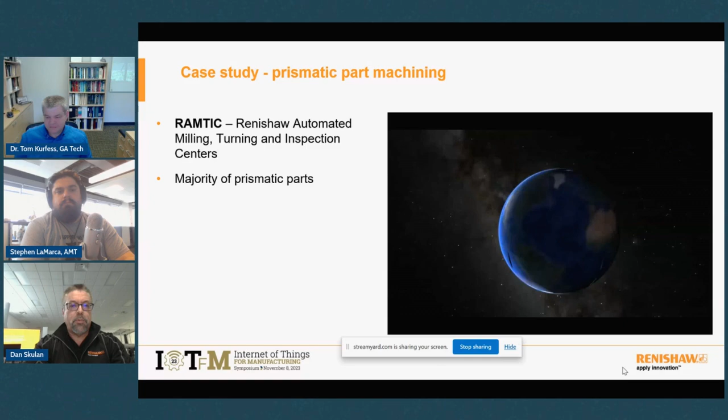So we make the majority of our prismatic parts using this. Again, this is not something we sell, this is just our own manufacturing. So we'll take you inside of the machine here.

First, we'll do a ball bar test, which allows us to establish the baseline of performance positioning. The probe comes out, we check an artifact that's been checked at 68 degrees, so we know what it is at temperature per standards. Tools are set automatically for length and diameter. Raw materials are brought into the machine automatically. The probe sets the work offsets, all automatically in cycle.

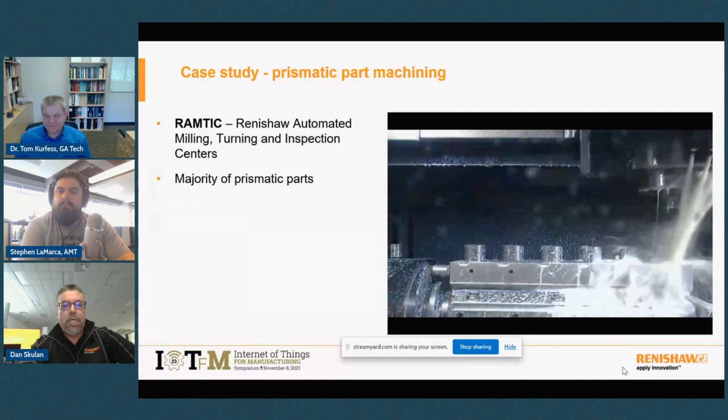Cutting commences, and after cutting commences, we can come back in and validate. We use something called gauge cutting, where we cut, measure, update, and then cut. We use in-process checking to make sure tools haven't broken, and then at the very end, the parts are measured in the machine. Because the machine was calibrated in advance, and we checked an artifact of known traceability in advance, every part that comes off the machine is traceable as if it were on a CMM.

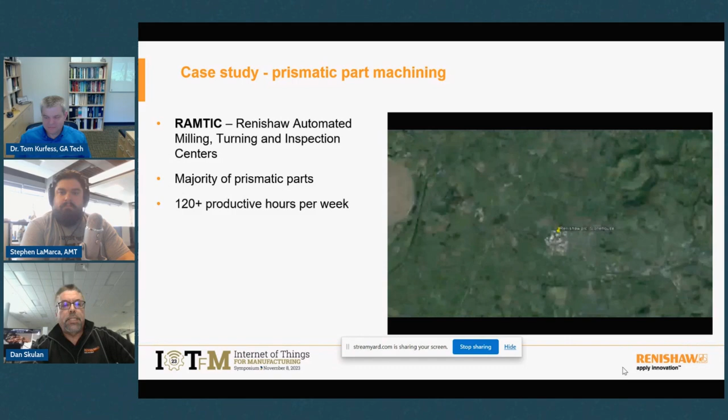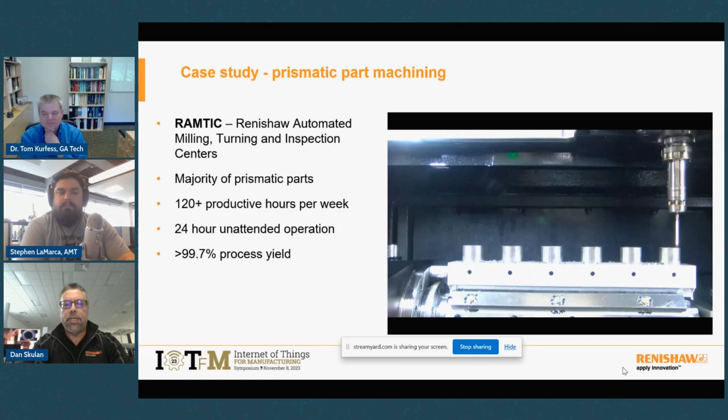We get about 120 productive hours per week in these manufacturing operations, 24-hour unattended operation with less than 0.3% scrap. I say we have 100% quality yield. Any scrap is caught in process and we destroy the part before it goes downstream, because the cost of quality is much higher than the cost of the part. So OEE pushing 90%, typically in the 85% range, and we have a ratio of machines to operators of 12 to 1.

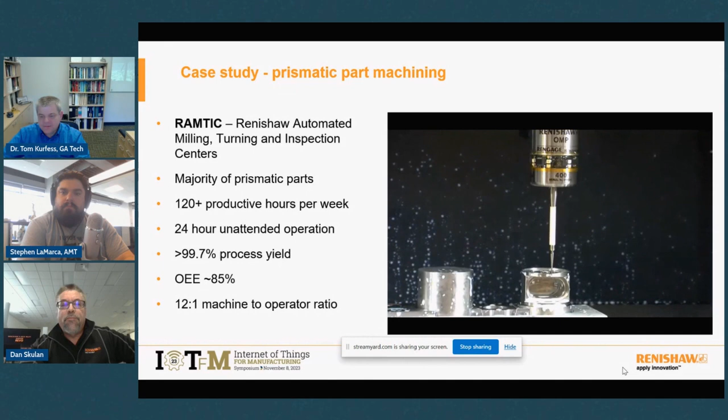So one operator going in the factory and managing 12 machines. I visited Renishaw prior to coming to work here. I've been here 28 years. I was a user of their technology in the CNC area, and I said, I got to go see this company.

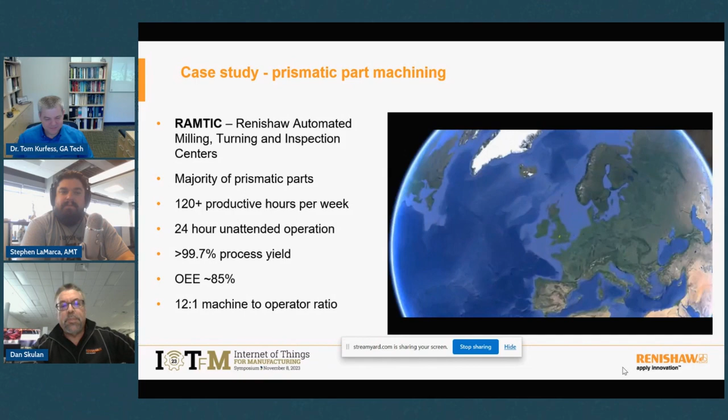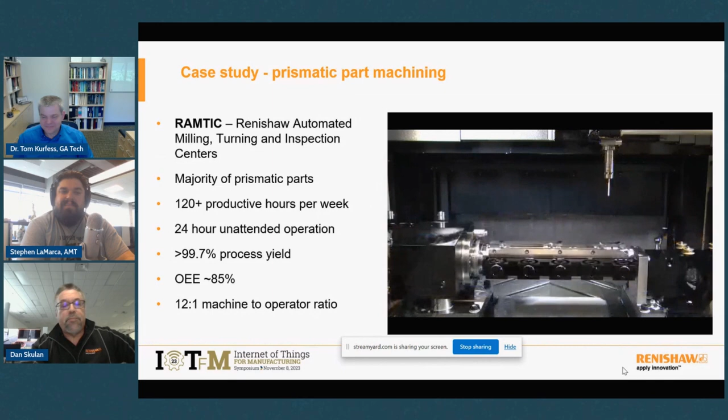And I went over, and there were two guys sitting in a room with 40 machines, all running. In our talk, one of the guys said, oh, hold on a second, light just came on, walked over to the machine, pressed a couple keys, fixed something, came back, sat back down, and we talked for another couple hours without any intervention from anyone in the shop with 40 machines running. Very impressive operations. I'm not bragging because I work here - I work here because I went and visited as a user of the technology and realized, wow, this company's really got some very switched on kit.

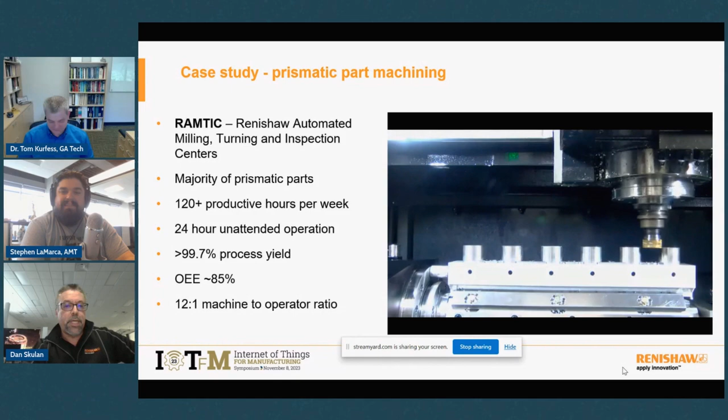That type of work is not for everyone, but it is indeed what a lot of companies are moving toward. I spend a lot of time going in from a consultative standpoint, helping companies. Typically, this is what we see: a mix of different machine make and models, very skilled operators standing by the machine, sometimes more than one, trying to determine the cause of an issue. So very high labor cost, very low efficiency.

The parts are stacked by the machine. There's good ones, there's scrap ones, and then there's a whole bunch in those yellow bins that are unknown. Typically what happens then is those accumulate and get carted over to a separate room with a CMM or a measurement device where they sit and soak temperature overnight, and then they are measured, and a determination is made whether they rework them, scrap them, or just ship them as is. So these operations tend to be very inefficient.

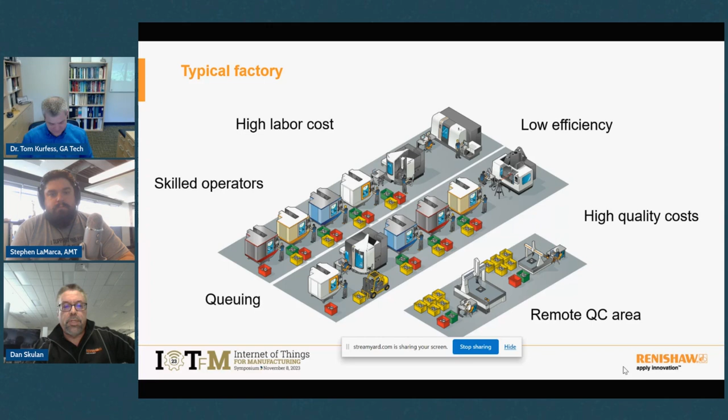What many companies are moving toward, and what I just showed you inside of our own manufacturing, is this type of a model, an intelligent automated factory. I want to make sure people know we're not suggesting you can invest all this money right away, but the tools you use and the vision of where you're going can help you make incremental moves in your manufacturing operations to get to the point where, at some point, you can be running 12 machines with one operator.

So the goal here with this type of automated manufacturing is, first of all, to reduce the reliance on just manual labor. That doesn't mean we're replacing people - we're just moving people from being a motion mechanism to being the brains behind the operations, which then, because you're amortizing the cost of these really skilled people over the equipment you have, lowers your overall labor costs.

One word we say inside of Renishaw, our president coined this, is that automation can make scrap at unprecedented rates without process control. So as you start to automate and move toward robots, for example, and robots are very affordable these days, you can use robots to tend a machine, but unless you have process control, you can produce scrap at unprecedented rates.

I attended a robotic conference out in California, and they were asking people on the panel what are some of the things you consider when implementing automation. The first thing I said is, get the cell phone number of the person you replaced, because you don't know everything that person did. When you think you're replacing them with a robot because they just moved the part from point A to point B, you're forgetting that this person was listening to the machine, holding a hand on it, feeling vibration, feeling the coolant, smelling the coolant - doing all kinds of things in the operation that you have to replace with direct process control.

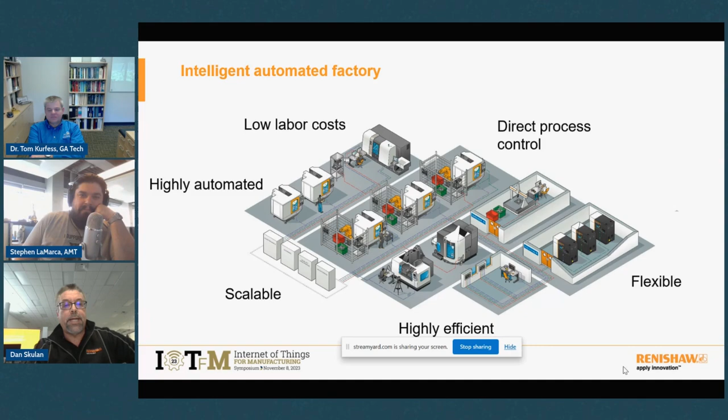On the other side of the spectrum, our capacity needed to grow. We placed 40 machines identical to our operations in England over into Miskin, Wales. Those machines, from original concept to implementation and full production, took 3 months - 40 CNC machines with full automation and full volume, by simply copying the exact same format we had.

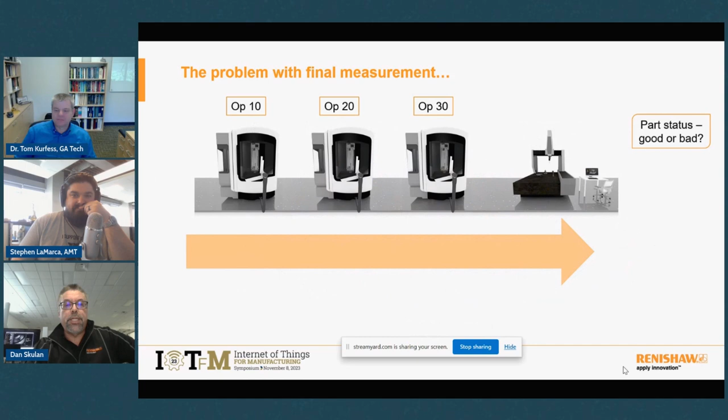Well, first off, looking at inspection at the very end of CNC operations is a painfully expensive way to ensure quality, because all of the value is already in the part. You have done maybe 10, 20, 30, 40, 50 multiple operations on this part. If you check at the end, you've already put all the value in. And if you determine there's a problem, then you're scrapping not just the part, but all of the value put in there along the way.

There's also a delayed response because you're potentially having that part set, waiting for your measurement system, your operator to be able to measure it. So you might be hours or even days before you determine you have a problem, and all that work that's been built that's in queue is potentially running at risk.

And it's really difficult to look at the final product and see, if you had a final cut, what happened with the roughing cut prior to that, because you've already removed that material. In many cases, what we see when we're working with companies that are having problems in manufacturing and want to increase their efficiency is they're looking at the final passes rather than looking at the initial roughing cut.

If you're removing roughing stock and you're supposed to bring it down to where you only have a 20 thou depth of cut for your final pass, but your roughing tool is wearing out and you're leaving 40 thou, and then you're breaking your final tool and having poor finish on there, a lot of times that's overlooked. So we see a lot of people chasing their tails at the end of the line because they didn't look at what happened at each stage of the operation.

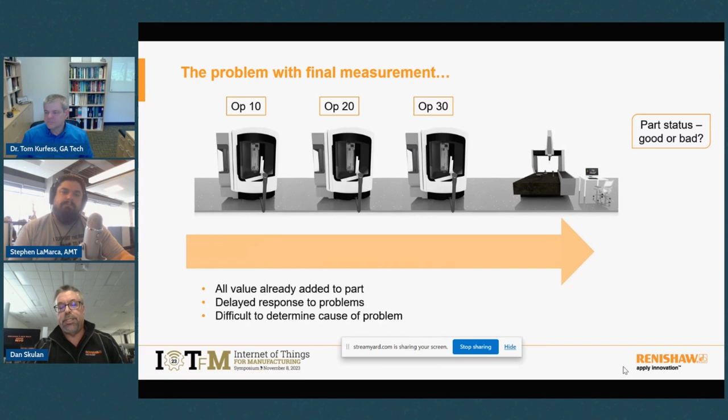So what we profess, and this is something to be deployed regardless of the technology you use, is putting checks and balances in before, during, and after each operation. This could be hand tools - you could come in right after op 10 and check things before they move to the next op. It could be a probing system directly on the machine, building that information directly into the machine, or localized measurement systems such as an automated gauge or even a coordinate measurement machine that exists between the operations.

And from there, you can preserve the value that you get at each stage, immediate response to problems - not only manually because you would have a view of it, but ideally, in order to capitalize on this move toward intelligent manufacturing, we need to have accurate, actionable information that's fed digitally at each one of these stages of the operation.

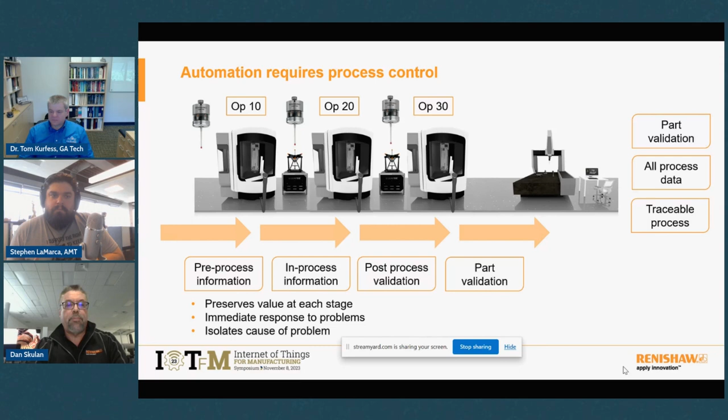From there, you can do direct process control. And if you want to look forensically at a whole system and whole operation, you can go back and look at what happened in between this operation and that next operation.

And a lot of times you need to tie in information such as bay doors in a building. I had one company that was experiencing problems every morning - they had rejects in their manufacturing. It was a medical device manufacturer, and I spent the night in there in the plant and looked at it.

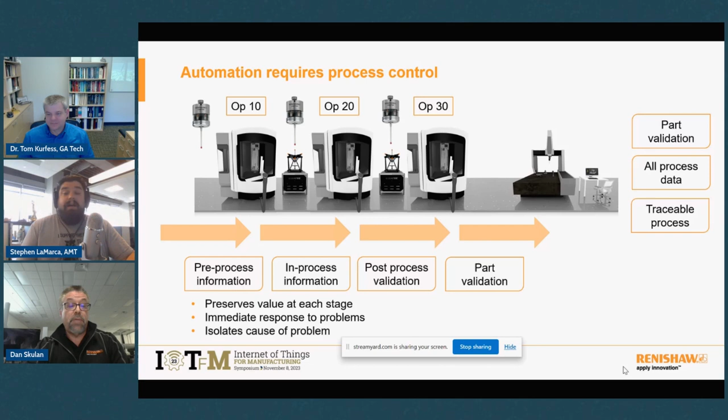And every morning at 6:30, the FedEx guy came and opened up the bay door right next to the Swiss turning machines. The temperature dropped in the winter by about 40 degrees for a period of 20 minutes, and it took another 40 minutes for it to catch up. But for that hour of time, they produced almost exclusively scrap. It was all having to do with an interaction that was taking place at one stage of an operation.

So to work with people and give people a way, kind of a system to go through, Renishaw uses this, and it's readily available - there's all kinds of material out there. Myself and others have published content on this, but it's something called the productive process pyramid.

So in any manufacturing, really in any operation, but we're talking CNC manufacturing almost exclusively here, we break down any work that you do into 4 stages. The bottom of the pyramid is the foundation - that is, what is the capability of the equipment?

Those are things that you do in advance of any tool cutting any piece of metal. So it's your environment, the installation of the CNC machines. Are they on the right foundation? Are they anchored? Has the machine been calibrated?

Is there some methodology for calibration to be ensured? So then the next stage up is process setting. That's where you're automating tool setting, work offsets on the machine, coordinate rotation shift on parts on the machine, where that machine can actually set up a workpiece and the tooling in place.

Next step up, in-process control. That's where you're taking measurements in process with the intention of controlling variation - tooling variation, workpiece, part deflection, temperature - things that take place over the course of a day, over the course of a shift. And the final stage, post-process, is where you're doing a comprehensive evaluation of the final part.

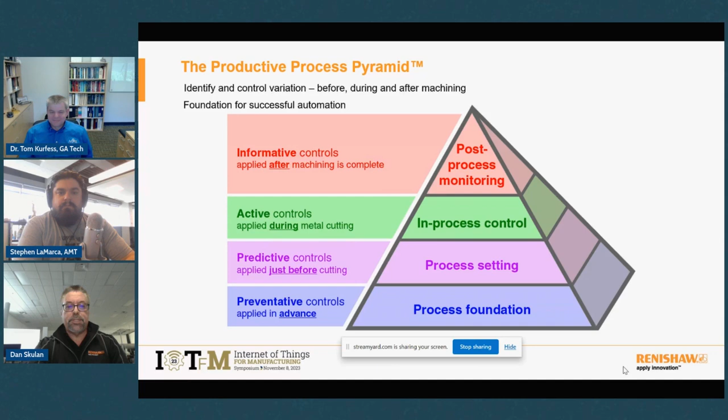I'll show you one more thing, and then I'll stop my screen and we can have a little dialogue, and then we'll talk about a couple other technologies. But one technology that I think is really important for people to use for the baseline of performance is a ball bar. Let me just go in here, looking at this.

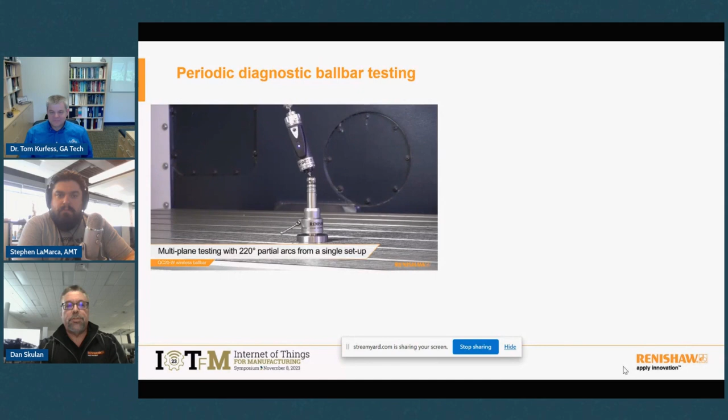This is a device that is used by pretty much every machine tool manufacturer and every machine tool service organization, and most end users of CNC machines have these devices. This device allows you to check the volumetric positioning accuracy of a machine in about 15 minutes. And from there, you can determine what the base capability is of the machine.

We have many companies that use this as a device to determine the process capability. At a very basic level, you may have 4 machines and you're producing, you want to know whether to put fine work or rough work. You can grade your equipment without doing any maintenance, any work on them at all - you can just say, oh, that's my 5 thou machine, that's my 1 thou machine, and that's my 5/10 machine. And so by getting a comprehensive footprint of the machine, you can determine what the capability is.

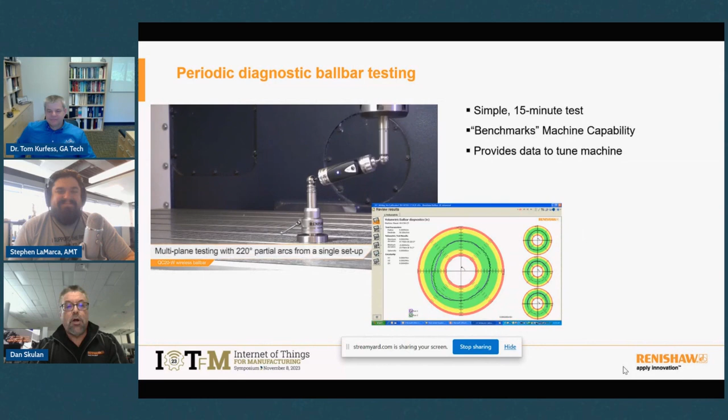But this device has been out since about 1989, and has been using artificial intelligence since then. So by looking at the shape of a hemispherical pattern that's detected using that device, we can analyze using a known database of machine conditions. We can do artificial intelligence assessment and say, this machine is out by this amount - go and check the ball screw on the C-axis of the machine because you have a drunken ball screw.

And it will tell you directly what's going on - so identifying the sources of error. You can look at this as a device to plot periodically. Inside of our manufacturing, we run this monthly on every machine and we store that data digitally. That data, every time we run it, is accumulated and we can look at trends. So we can say at the rate that we're running, 3 months from now, this machine's B-axis, or X, Y, or Z axis, will not position correctly. What we will do then is we plan maintenance around what will, through the intelligence of this device, likely occur.

So I'll show you results on a machine. This was a machine - I won't mention the name or where it was at, I don't want to alienate anyone here - but you'll see on there the plot, the data that was collected, and on a perfect trace, that would be a perfectly round circle. You can see that it's oblong and it's tilted on the 45.

The software detects that and says that the number one cause of error here was squareness.

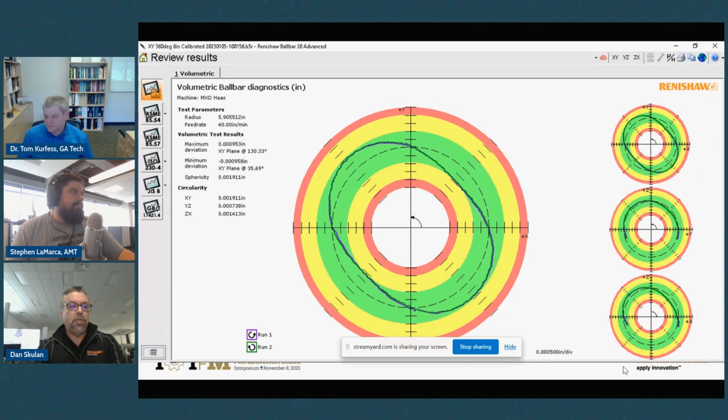But most times the machine isn't even on an adequate foundation. So making sure the machine's on a good foundation and is leveled correctly, you can eliminate—from our experience and my direct experience over the last 30 years of running this device—probably 80 to 90% of the ongoing errors caused by a machine that somebody didn't install correctly, or after it was installed, didn't go back in and check. Because when a machine is first installed, over the first couple weeks it settles tremendously, and about a month after install, it should be checked again. Then if it holds true with periodic tests, machines will last for years.

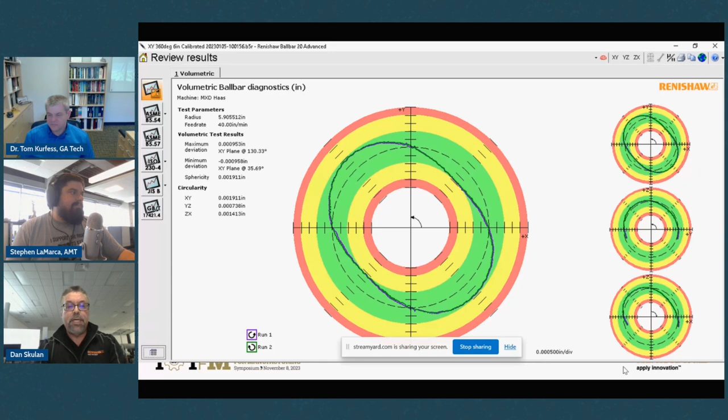If you allow the machine to run out of square for months, even the first couple years, you'll be burnishing the guideways on the vertical axis of that machine over time. You can take a million-dollar beautiful piece of equipment and in a matter of 2 or 3 years have a machine that couldn't hold 5 thou. So I'll throw that out as a freebie to the group.

This is that same machine showing the analytics that exist from there—showing that the number one error on this particular machine was squareness, and what the contribution of that error was. Down here on the bottom you see the positional tolerance, showing what that machine was able to handle as far as positioning capability within the volume of the test, in this case a 1 foot, 300 millimeter sphere. So, any questions on that, guys?

I think that's very cool. Just to highlight, the ball bar, as you said Dan, has been around a long time, and all it's doing is measuring. You've got 2 balls on each end of the bar, and it's measuring how far they're moving as you go around in a circle. It's just an LVDT—a linear transducer—with a ball on the other end. Those balls are round to within 1/4 of a micron, or 10 millionths of an inch, and they're mounted in a 3-point magnetic cup that identifies the center line at all times. So that's showing you that video running again.

If your machine makes a perfect circle around this center point, that bar doesn't change in length at all. So there it's doing the vertical, and here it's going to do the complete circle. If your machine is perfect, you're not going to see any change. But of course we all know there's backlash and so forth, reversal error, and you see all of that.

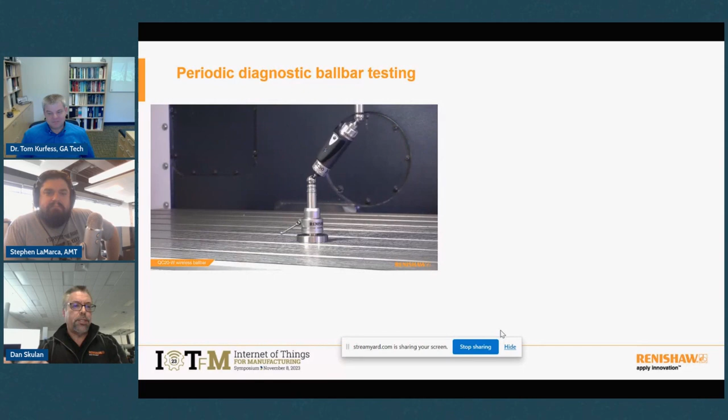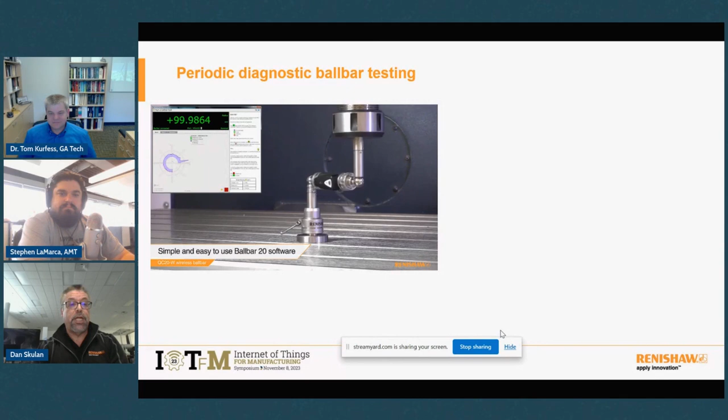When you run a circle, I want people to understand that you're exercising everything the linear axes of that machine can do. If you pull the way covers off the back of a machine and look at what's going on, linear axes move back and forth—they stop, speed up, slow down, stop, turn around. Rotary axes move in a circle, in one direction then back in the other. That's all they do. So when we move in a circular fashion, we're testing the 3-axis linear systems, or 2 on a lathe, but buried inside that signature are all the potential positioning errors: backlash, reversal spikes, straightness error, squareness between the axes, acceleration, deceleration.

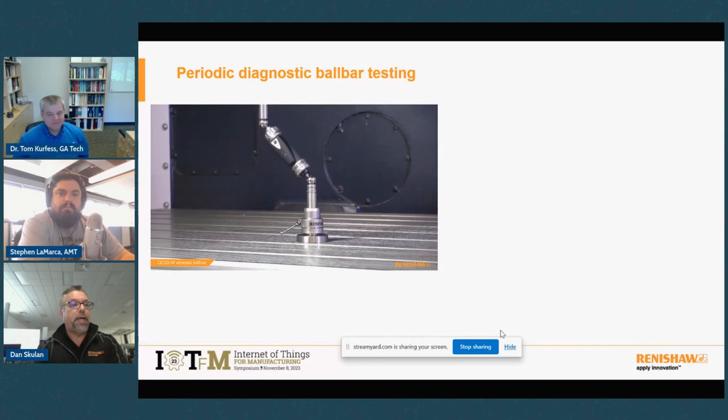All of those things are buried in the data. So it's not just checking a circle. That circle contains all of the error sources inside of the linear axes of the machine, and then the intelligence pulls that data out, so you can drill it down to the root cause.

Right, I mean, it's right in the money. And before I know, Steve, I saw you. Stephen, took your mute off.

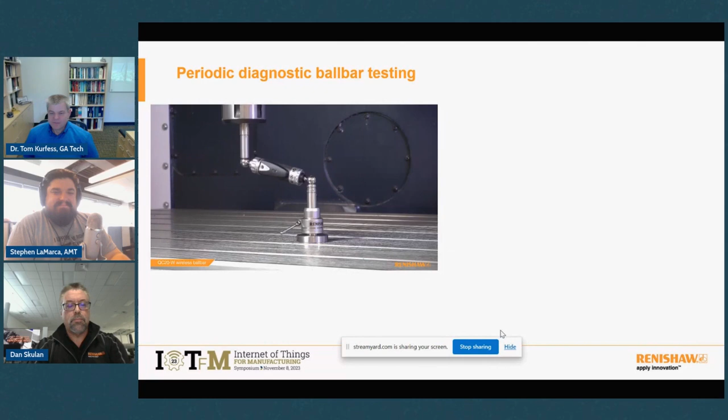The other thing that I think is just great in terms of the difference between today's modern ballbar and the ballbar from the 80s or 90s is the wireless capability. If you've ever had an old ballbar that's wired up, you can imagine dragging wires around with you in an operation like this. Sometimes they can get tangled up. The new wireless systems are really wonderful.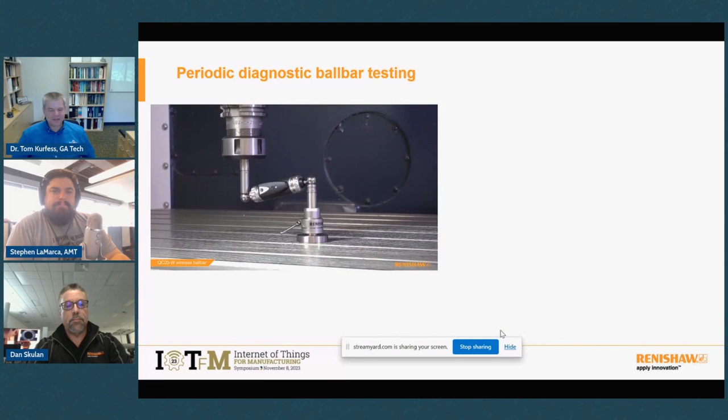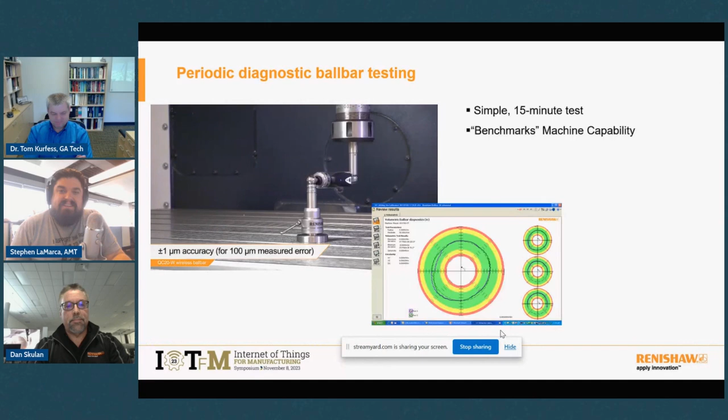But Stephen, I see you've gone on mute there. Fire away, sir. Yeah, I just wanted to say thank you so much, Dan. I've learned a lot from this. This is really fun. I actually don't have a whole lot of experience with ball bars. I've seen them at several IMTSs now, and never thought to ask what the heck one was.

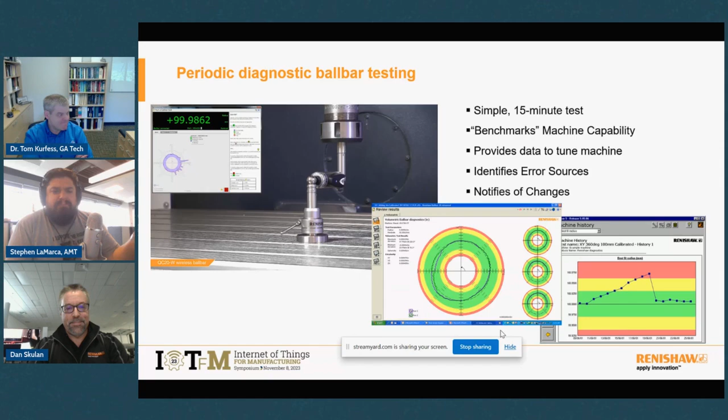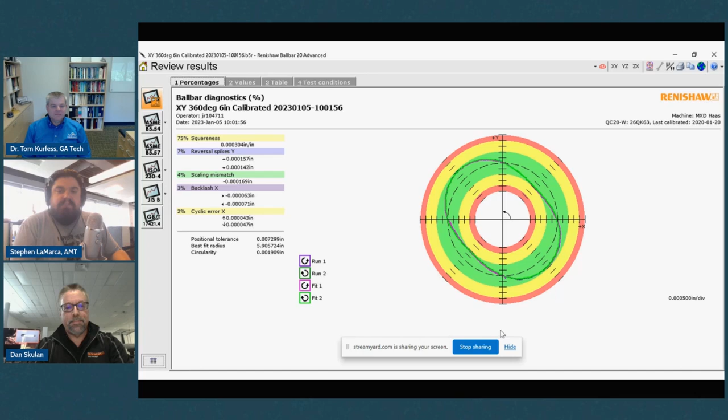But I do like to geek out about maintenance a lot, and I really appreciated the fact that there is a sort of sensor, if you would. I know Renishaw for a lot of their incredible metrological technologies and sensors. When Mazak came out with the Integrex i100 ST, I first geeked out about its capabilities of closed loop gear manufacturing, and I quickly learned that all of that is capable because of Renishaw's metrological technology embedded in that machine.

It's really cool, and I appreciate the nod to early AI technology. I also learned that the ball bar was birthed the same year I was, so that's fun. But yeah, it's really cool that this was like the first peek into prescriptive maintenance, as I like to call it. Some people call it adaptive, anticipated, or informed maintenance, but this is levels beyond reactive, preventative, condition based, and a step ahead of predictive maintenance. It's crazy that this is this old.

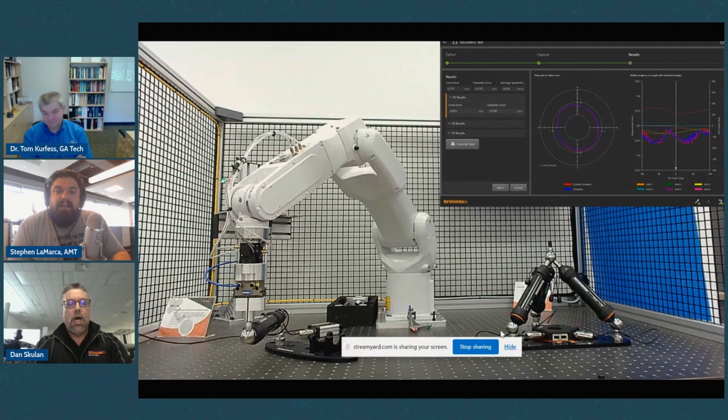Yeah, so like 35 years, and I'm showing here, hopefully you're seeing this video. This was launched last year, taking that same technology, larger profile, longer travel. One of the challenges faced in industry is the accuracy and repeatability of robots and how quickly you can set them up and how quickly you can recover. So we've adapted that same technology to robots.

Over here at our race facility, we have a cell off to my left where we've entertained some of the largest OEMs here this week looking at this technology. That is a ball bar sensor technology that we'll be showing at Automate, but we'll be showing at IMTS this year, and I look forward to you guys seeing that.

But we've also adapted probing technology to robots because robots need to have the tactile feel that a human typically has. If you're going to replace manual operations, you need to make sure that the device is repeatable and has good precision, and the ball bar allows you to do that.

You can see the trace up on the upper corner of the screen is very similar to what you would have from a ball bar that goes on a CNC machine. And then the device off on the right there with the 3 bars on it allows you to reset the 0, the encoder position, so you can reset the robot back to its base condition and base starting point.

We've also launched a suite of probing systems that can go directly on the robot, all wireless, and software to make sure that you have good metrology for the probe, which is something as robots are used more and more. Initially it was just moving parts around in space, but you're starting to see robots, and Georgia Tech's doing a bunch of development on this, doing actual machining. As you start doing that in the aerospace world, being able to have a tactile sensor on the end of a robot with known calibration and known capability is very critical.

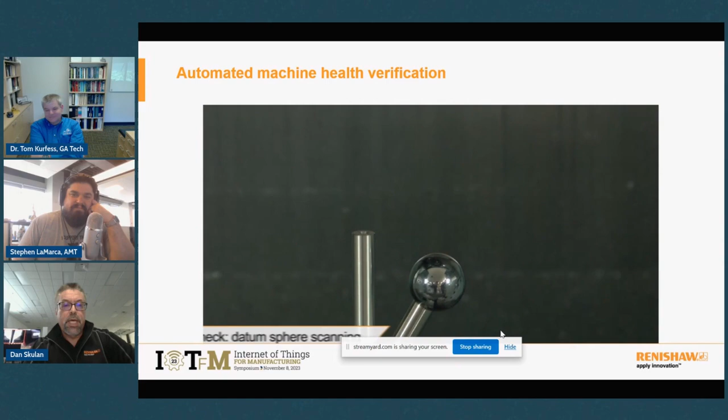So go ahead if you wanted to. You got some, yeah, let me show you. I want to make sure for a second time, but you brought up the Integrex machine and the gear manufacturing. In the gear manufacturing, we embed a probe called a sprint probe, and it's a scanning probe.

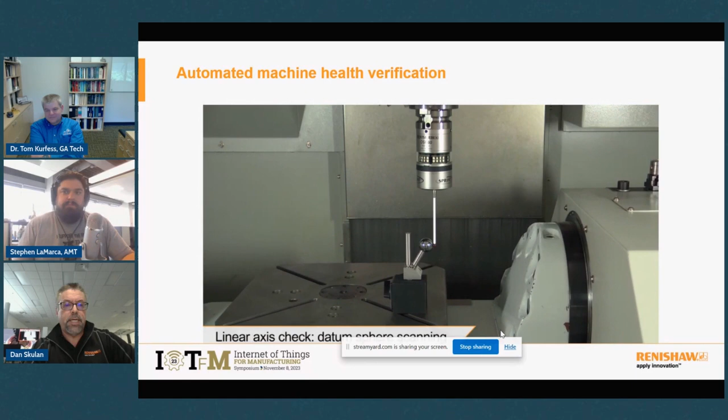And I'm going to back up again so you can see the start of that. That's the probe right there. So rather than single point touches, this takes constant contact and spits out X, Y, Z, I, J, K values real time from the probe.

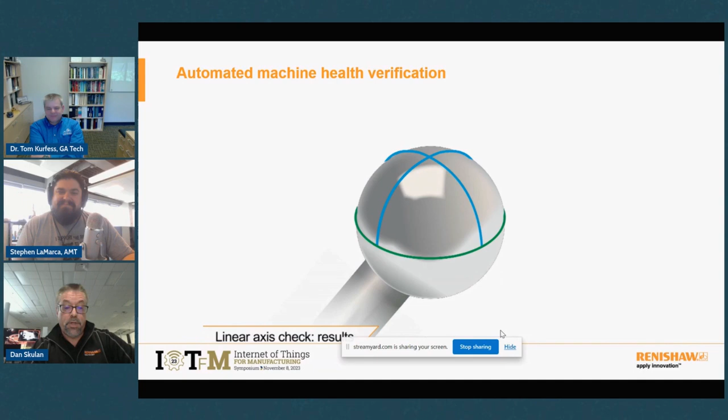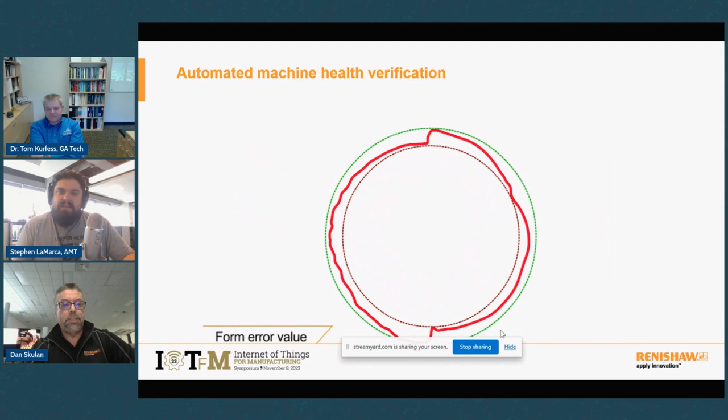So we can scan a sphere on the side of the machine, and by scanning a known sphere, which is a quarter micron type precision, with that sprint probe, we can do the same test that the ball bar does in process. We have some medical and aerospace customers doing this already, and the machines can check themselves in process by leaving that artifact out on the corner of the fixture. I'm honored to say Georgia Tech will be getting one of these on their Mazak machine.

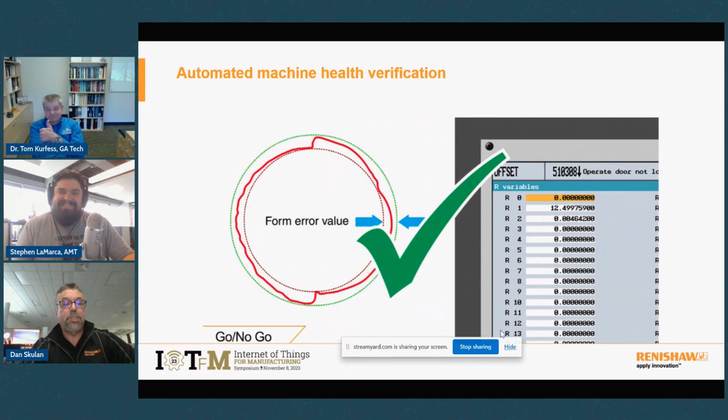And that sensor can be used for a tremendous amount of other techniques, one of which I'd like to share with you guys because I think you'll find it very interesting. This is that same probe going into a tapered cone, moving around the rotary axes of the machine. And from there, we can figure out the center of rotation.

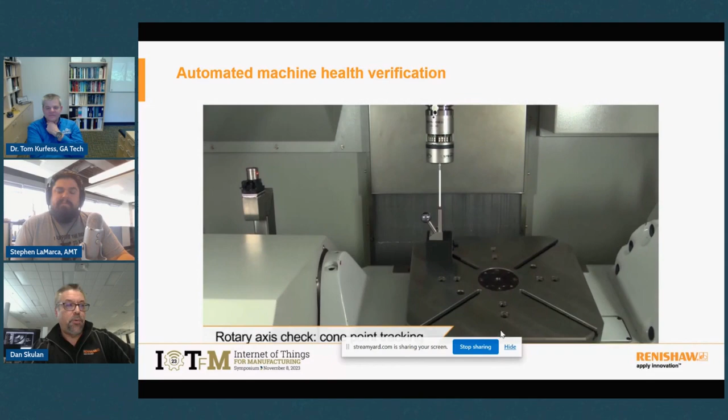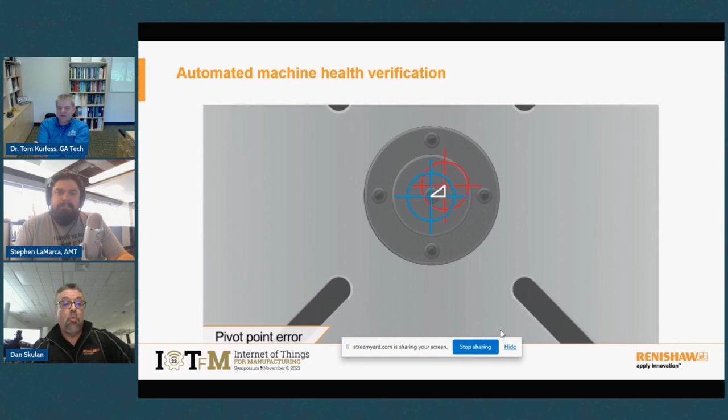So you mentioned the 5-axis machines. One of the things that has to be maintained on a 5-axis machine is where that center of rotation is. In a digital world, it's always perfect. So when you're talking about simulated digital twins, the digital twin, when simulated, is perfect unless you can get the real machine information. So what we do here is we can measure the real kinematic location of the 4th and 5th axis of the machine, output that for simulation purposes, but improve it as well.

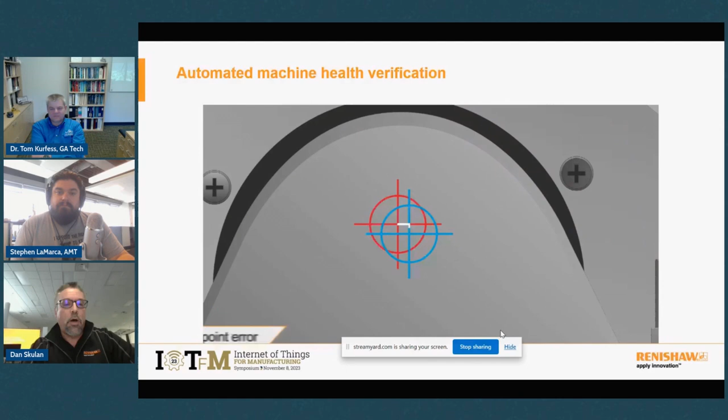And so using this probe in situ, we're able to take a 5-axis machine, measure its capability, and update its performance real time. So adaptive, intelligent control of the machine and operations.

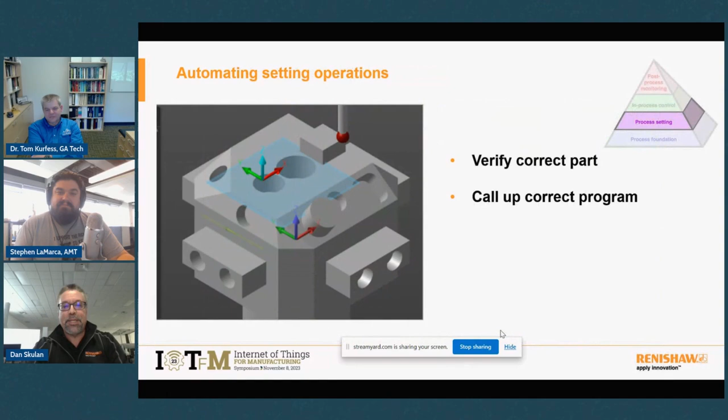I'm switching the screen to see if you had any questions on that. I want to show you something that I think you guys will find very interesting. So I apologize while I zip through a few slides here. Any questions on that though?

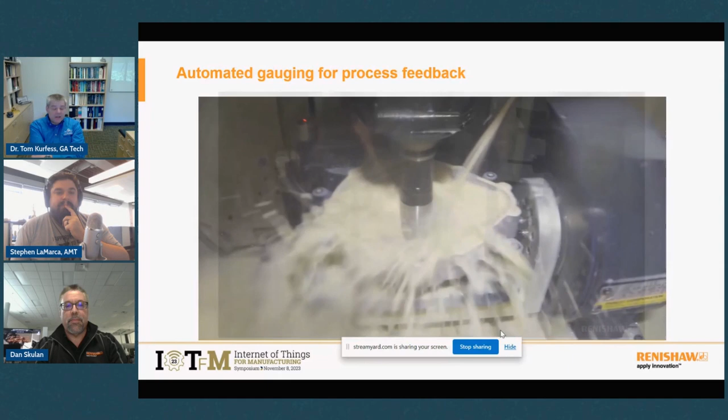Yeah, well, I'm telling you, some of the things that we're talking about here—part of it is there's some simple things you can do. You can basically measure your machine, baseline your machine, and let's say you have a crash, or something happens to your machine. You can go back and say, let me do the measurement again and see if my machine has changed.

I think a lot of times people will have a crash and they don't have a feel for it. Did I hurt the machine or not? Do we have to do something with the machine? So even something simple like this: how was it yesterday, and let's take a look at it today. Is it the same machine?

Right. You know, gets back to your point, Dan, in terms of how repeatable is your process. Well, how repeatable is your machine? If it's the same machine as yesterday, then you're in pretty good shape. If it's a different machine than yesterday, then you better go back, like you just made that calculation in terms of the rotational error on that 5-axis machine. Okay, let's see if we can correct for it and so forth. They can improve it. Correct.

Yeah. What I'm thinking about is, okay, I think we need to have several podcasts out there to really talk about the tool set station—no more touching off, kissing off on your part and so forth. Measuring whether it's the ball bar or going off on the precision sphere. I think maybe—and by the way, the ball bar is pretty cool. We might want to sit down and say, here's what the output of the ball bar is, and here's what you're getting, and here's what you're seeing in terms of some of those reversal errors.

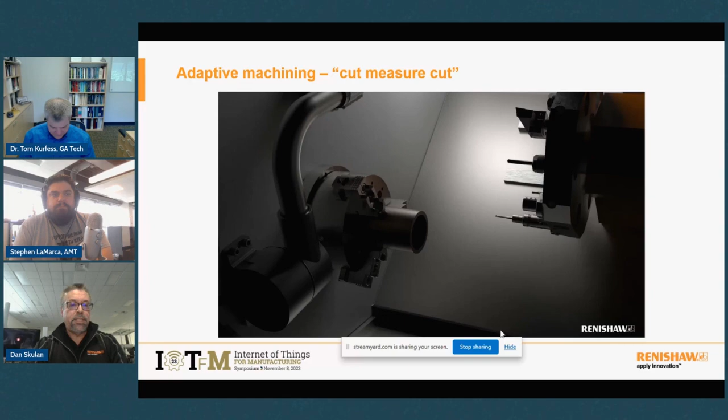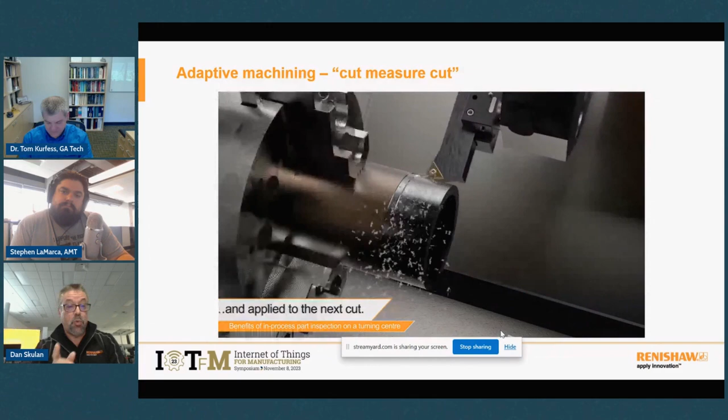A very simple case here would be in lathes. With a lathe, because of the structure, there's a lot of metal in a big machine loop between where the part is held in the spindle and where the tool is, and thermal changes in the environment can have drastic effects there. So what we do is a gauging cut, then we measure, then we apply an offset to the final pass and dial in.

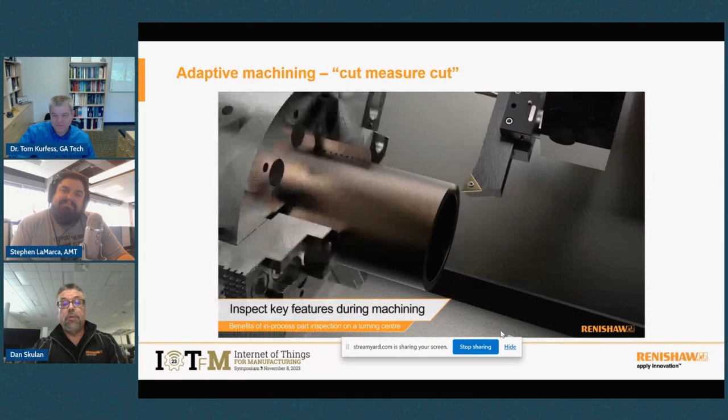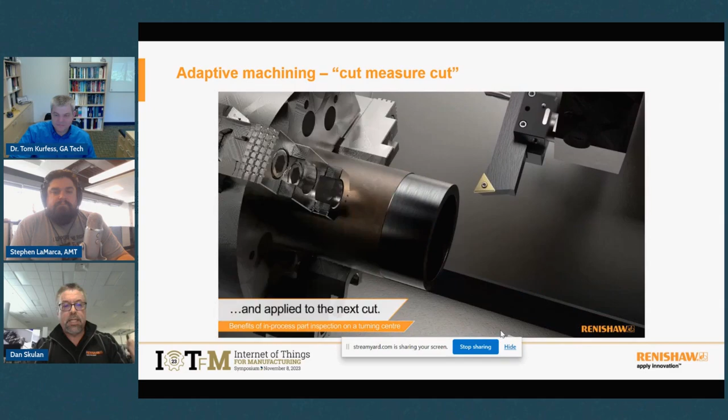I've taken mediocre machines using this technology and held a handful of microns of size. Without this technology, you'd be lucky to hold 100 microns. This is commonly used in aerospace for decades, but other manufacturers, if you have a probe on a machine, can use this gauge cutting technology—cut at a depth, leave a stock allowance, measure, update the tool, and do that last pass. That's a very valuable takeaway: know what your machine is capable of, then use this gauge cutting technique to dial in for tight tolerances.

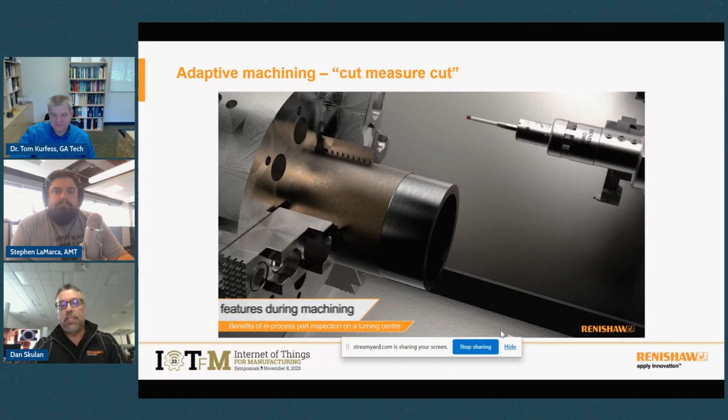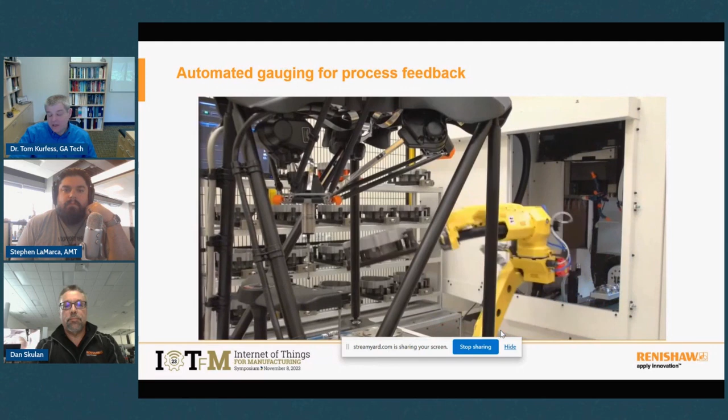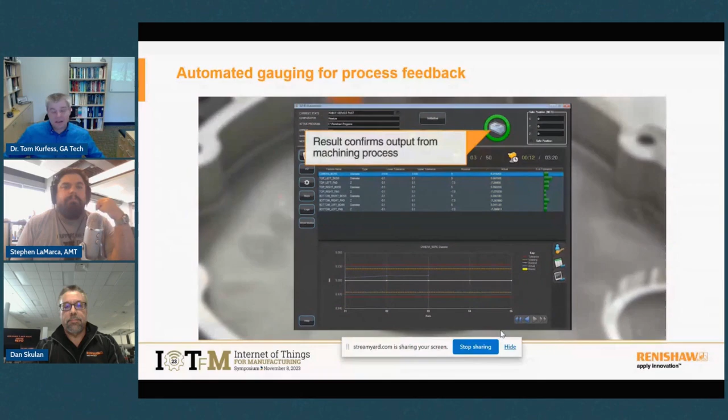Very valuable, and I think it's very cool. It's not a whole lot different than how we used to set up machines, but now you're using it in an automated fashion. The other fun thing people often ask about is lasering up their machine—how does that work? So we might want to bring you back for that. I know we've run a little over time.

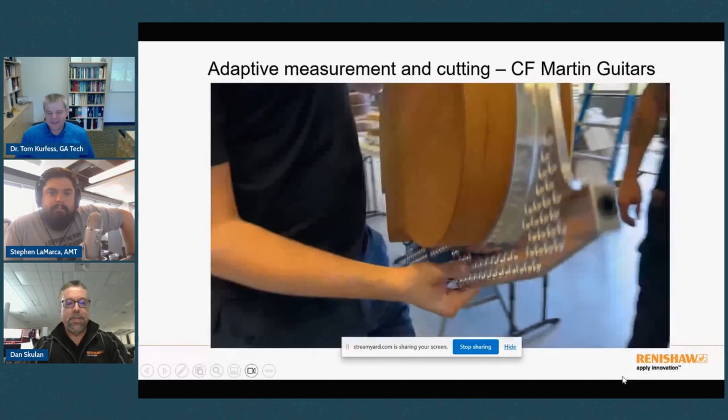Let me give you a sneak preview. This is a video—hopefully you can hear me talking over it—of a project we did in cooperation with Mazak, C.F. Martin Guitars, and Renishaw. This is adaptive scanning and cutting.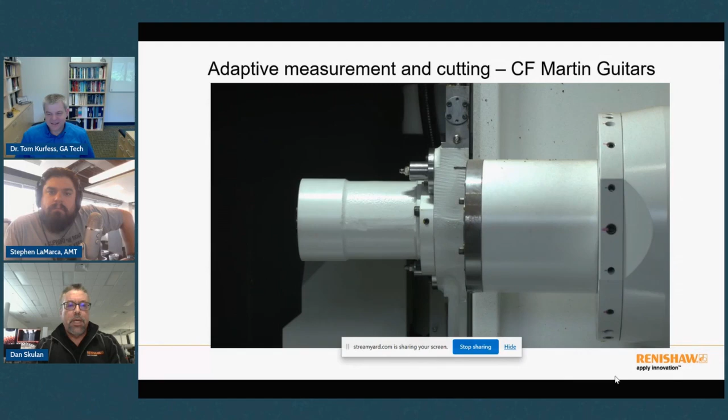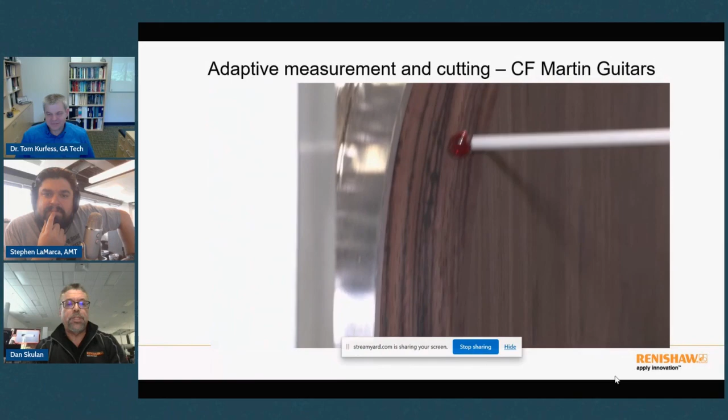Guitars are made—every one of them is unique—and Martin makes absolutely the finest instruments in the world. To preserve the value of that beautiful wood and handmade craftsmanship, we're using technology to adaptively scan each body and create a unique tool path to cut the binding and trim. It's called the purfling operation in Martin Guitars.

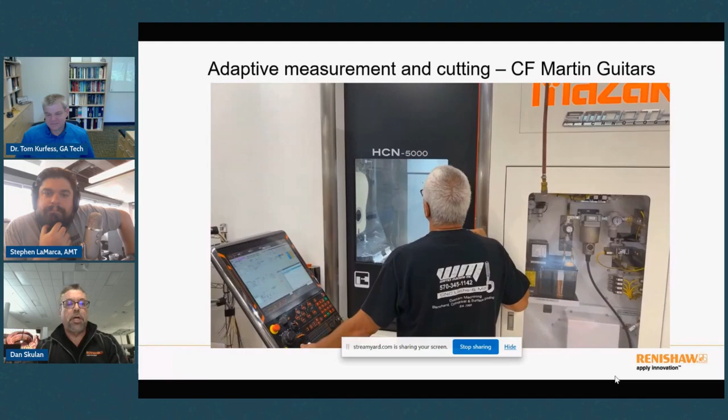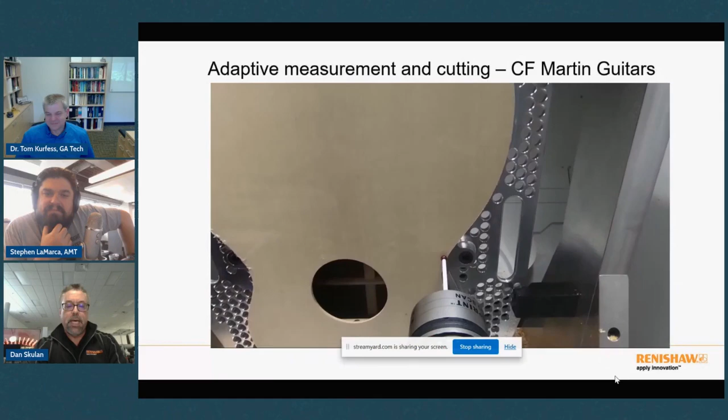This is, just for you folks, a sneak preview of what's coming at IMTS. We're going to be showing this and digging into it deeper. But really, behind the scenes of this is adaptive scanning and adaptive cutting that can be deployed in any industry. I thought you guys would appreciate that sneak preview of what's coming up at IMTS.

Very cool. So I think we're kind of out of time here, but we're laying the foundation, no pun intended, for a couple of future opportunities. This is some pretty cool technology—I'd definitely go check out what Dan and team have over at Renishaw at IMTS and see how it comes together.

A lot of this technology is great on state-of-the-art machines, but it's also very useful on some of your older machines. It's not something you've got to buy new for—I'm sure the folks at Mazak would say you need the new machine and the whole bit, but the reality is it's very useful even on older technology. And as you mentioned, Dan, some of this technology has been around for quite some time.

Cool, alright. Look forward to working with you guys in the future, and anything we can do, glad to help out.